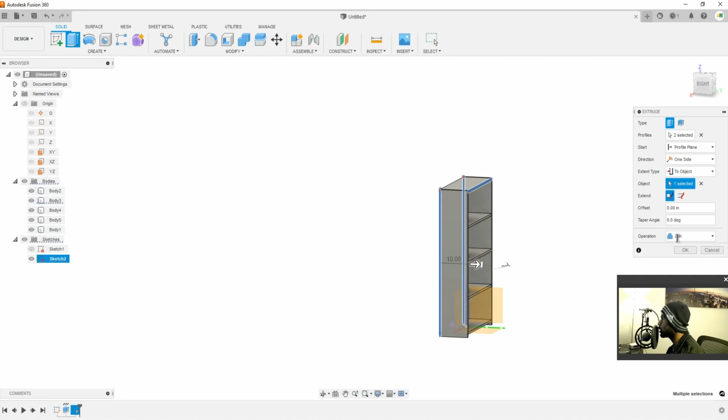In this series we take common woodworking projects and show exactly how they're designed in Fusion 360 from A to Z. Today we're going to be looking at a bookcase that you can pick up at Target, and we're going to reverse engineer it, and then we're going to be making our own modifications so that it can fit our space. So if that's something that you're interested in, let's go ahead and get started.

Alright, so this bookcase that we have today is a 3-shelf bookcase from Room Essentials that you can buy at Target, and it's $25. It's got the dimensions here for 35.98 in height, 24.49 in width, and 9.45 in depth. We're going to be changing that to be 10-inch in depth, 30-inch width, and 48-inch height.

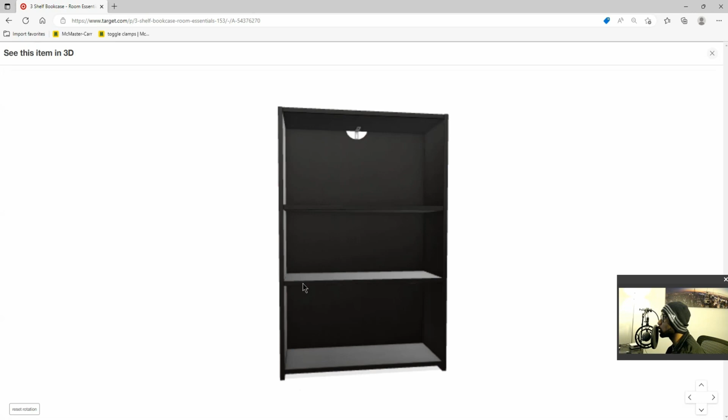It's really cool that here they have the 3D model that you can take a look at. But one of the things I realized is that you can't make a change to it, so you're basically stuck with what they have. So as I mentioned, in today's video we're going to be modeling our own, and slightly change it to the dimensions I just mentioned. So let's go ahead and get started.

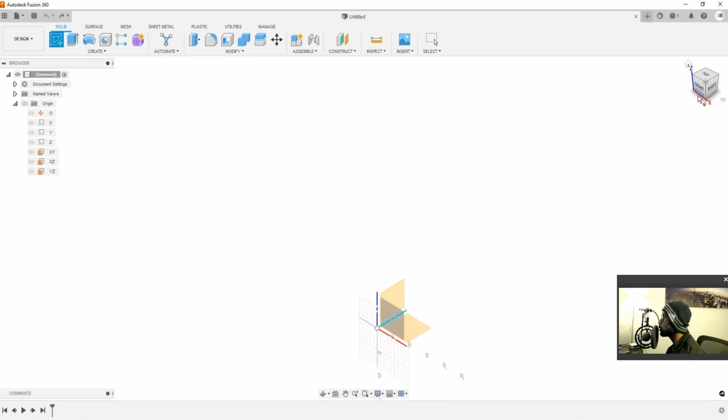All right, now that we have Fusion up, we're going to try to take as little time as possible, but we are going to go through every single click, and at the end we're going to end up with a bookcase. We're going to click create sketch and sketch on the XZ plane. We're going to do the first of our 4 shelves and then our 1 top piece, so a rectangular feature. We're going to do center rectangle, click at the origin, and just sketch and drop.

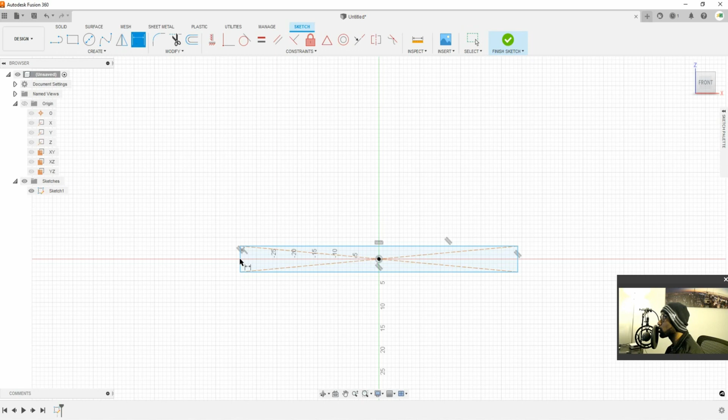You can type in tab and enter the dimensions directly, but I'm old school, so I just click sketch dimension here, and we're going to assume that each panel is 0.75 inches or 3/4 thick. Then we zoom out. We said that we want our width to be 30 inches, but we need to take into account that we're going to have our left panel, which is also 3/4 inch, and on the right side, that right panel, which is also 3/4 inch.

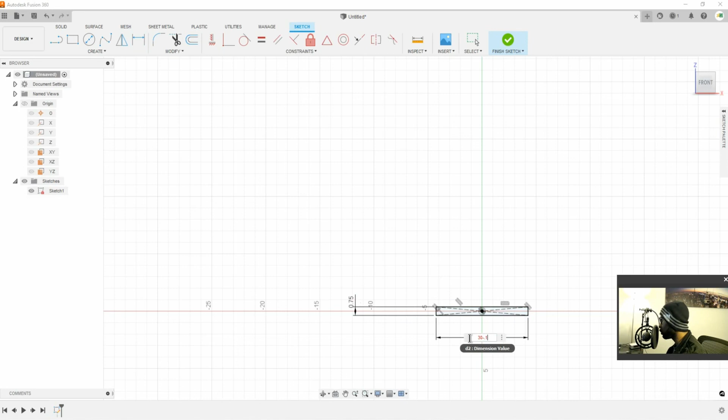So if we want an overall width of 30, then we need to do 30 minus both our panels of 3/4 inch. So it needs to be 30 minus 1.5, and that'll give us 28.5. So once we add on our panels, we'll get that width of 30. Our sketch is fully defined. We've locked it in at the origin, defined the width, and defined the thickness. That's turned all of the lines black, which means it's fully constrained.

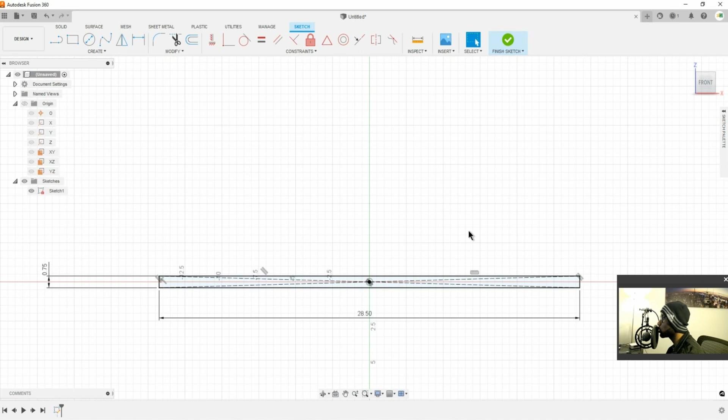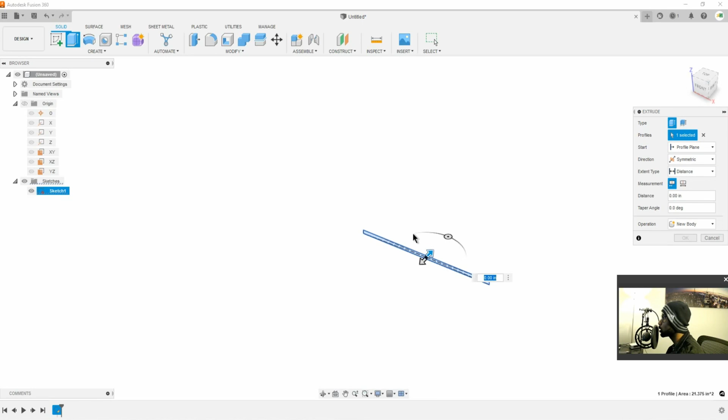We're just going to clean this up. Got to stay clean. Then we finish that sketch, and it's at our XZ plane, which is where we sketched originally. Now it's time to give this some volume, some geometry. We click on extrude, and it's asking which way we want to extrude. We're going to do a symmetry, just in case we want to mirror later on, and the distance on that symmetry is 5.

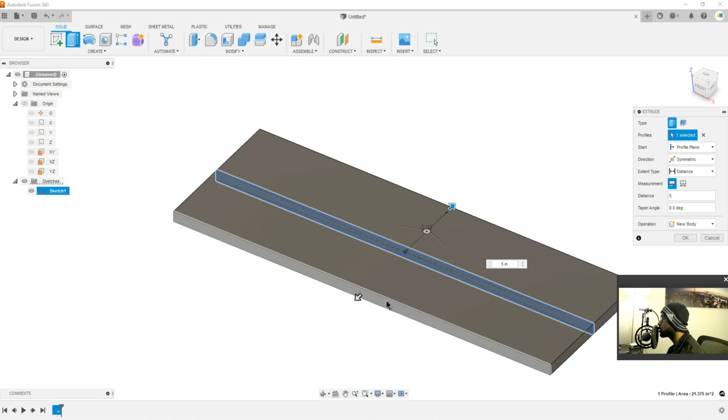So it's going to go 5 from this sketch on our plane to this plane here, and then from this plane to this plane is 5. We said that we want our depth to be 10. So now when we click on this edge, you can see that the length is 10 inches. That's exactly what we wanted.

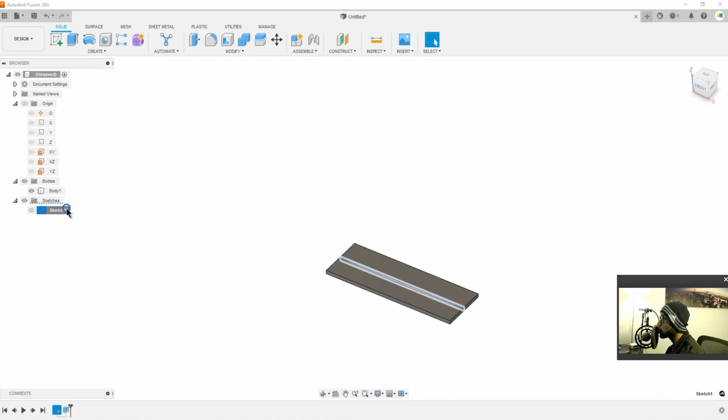Okay, so we can do a rectangular pattern. We could have done that in the sketch; it's up to us. I'm just going to go back into the sketch and do it: right click, and edit sketch. I was going to show you the other way, but this way is just easier. So we click rectangular pattern, and then we select an object.

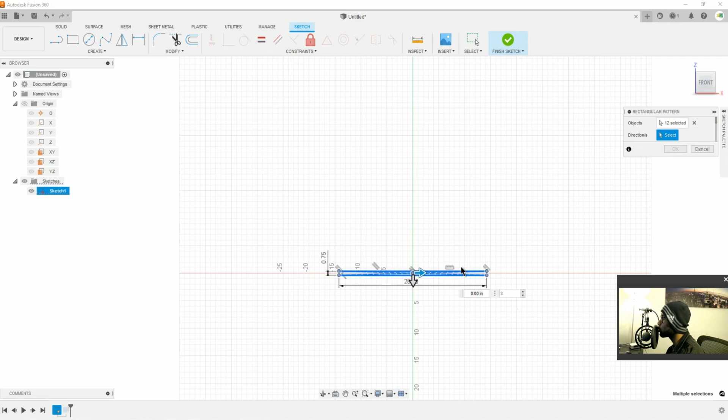We can click on each of these lines individually, or we can hold the left mouse button and drag over, which encloses everything in that window in our profile. So 12 features selected. Now it's asking for a direction. We're going to go up this way and give it a height as well as a quantity. If you remember from the photo, there was a 1-inch difference from the shelf to the ground. If we can go back.

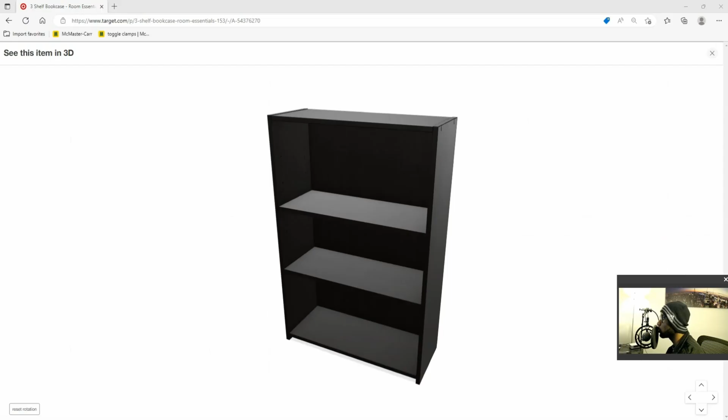So right here, every software is different when it comes to rotating. So here, as you can see, there's a 1-inch height between here and the shelf. So we're going to replicate that. So here, instead of having it be a full 48, we're going to have 47 inches from here up there.

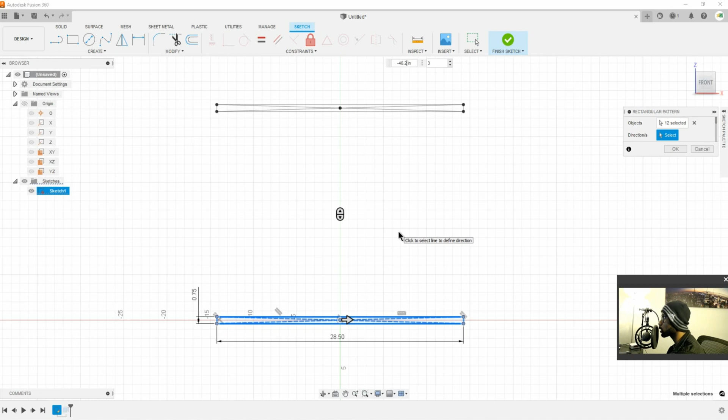But we also need to take into account the fact that we already have the 3/4 of an inch of plywood there. So instead of doing 47, it's actually going to be 47 minus 3/4 of an inch. So the height is going to be 46.25. So now there, from this bottom edge to this top edge is 46.25, and we need 5 quantity instead.

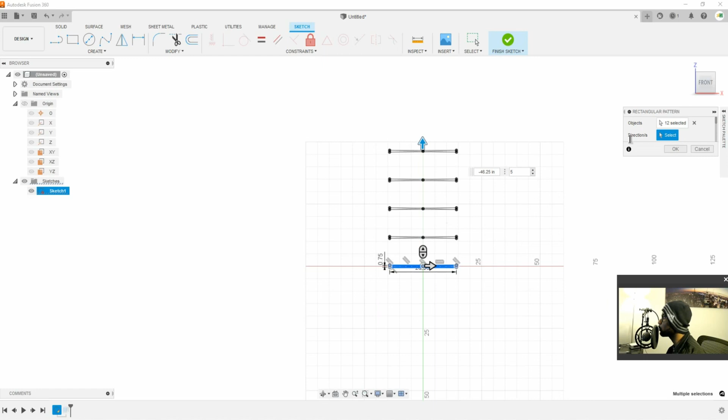So shelf 1, shelf 2, shelf 3, shelf 4, and top piece. We're going to click OK. So 46.25 and then a quantity of 5. Okay, so now we have all of the shelves that we need.

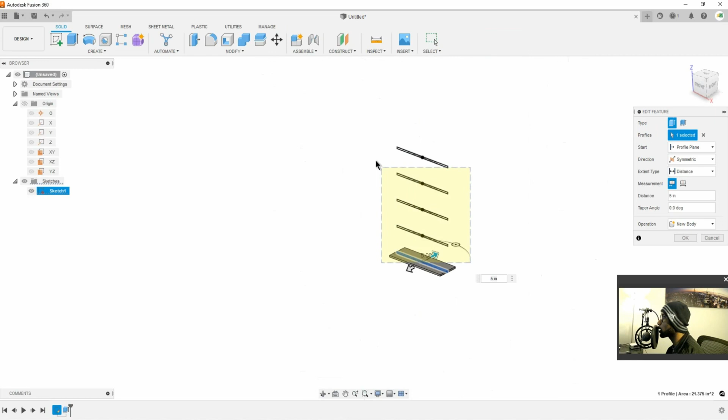And then here under our feature for profiles, we're just going to select all of those. So now we have all 5 profiles selected. We're going to click OK. So 1, 2, 3, 4, 5. I was going to show you the other way where you just create one and then you could do a rectangular pattern for the body, but instead we did a rectangular pattern for the sketch.

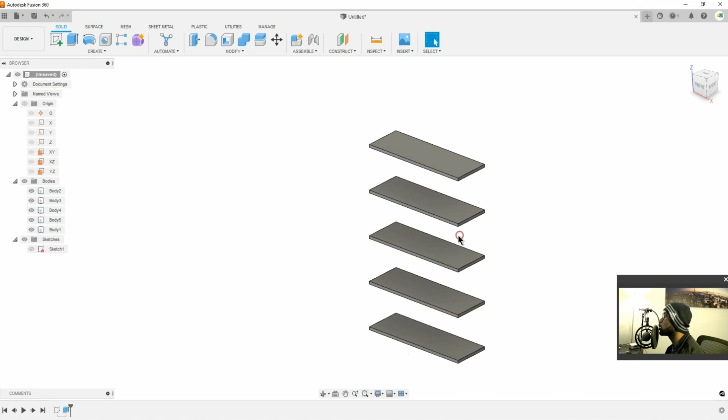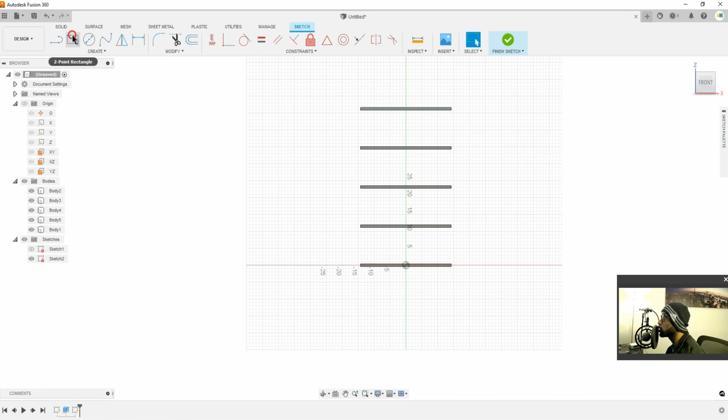So now that that's done, we have everything we need, and we are going to create our left and right panels with that 1 inch off the ground. So we're going to take advantage of existing geometry. We're going to create the sketch on this face. The face is also a plane, so the two work basically the same. So here, instead of a center rectangle, we're going to do a 2-point rectangle, and we're just going to sketch randomly in space, and then we will use our sketch dimension to define it.

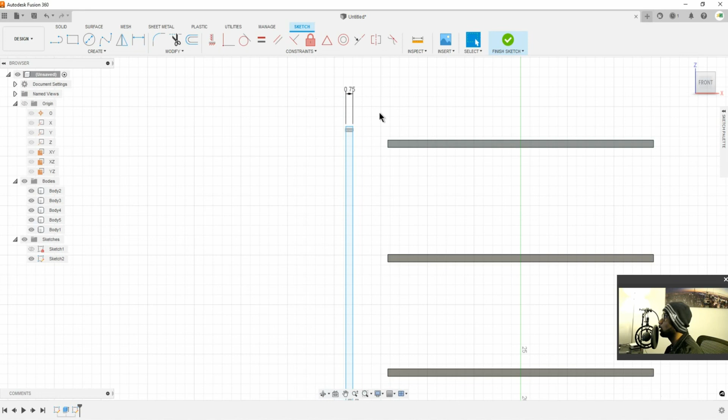Okay, so first thing we're going to do is we're going to make this 3/4 of an inch, so 0.75. Okay, so now that we've done that, we just need to do a coincidence mate for the top. So basically we want to say this point will go to this point. So we're going to do this point and this point. Okay, so now it turned black there, so we know that that part is fully constrained.

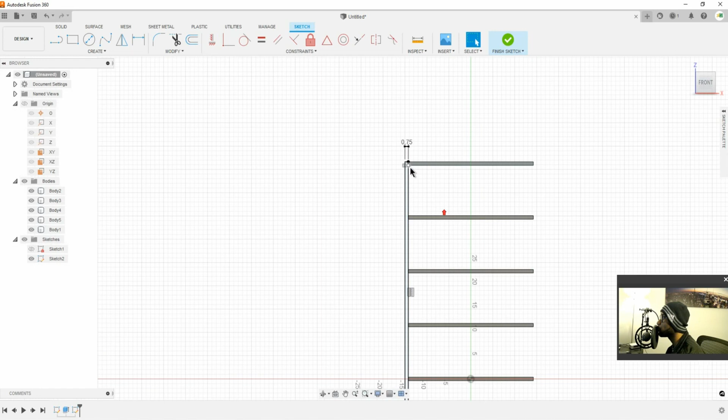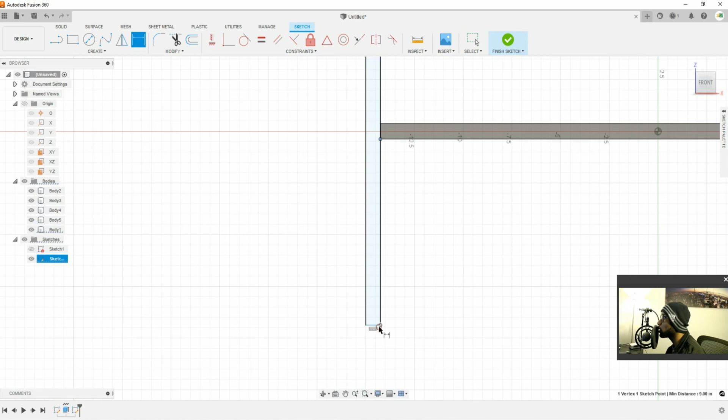So the good thing about doing the coincidence is, again, we don't have to do any dimensions. We just tell it, hey, go from this point to this point, and we want you to be touching and adjacent. Okay, now the bottom. So on the bottom, we're not going to do a coincidence mate with this point to that point, because again, we have that 1 inch off of the ground. So we're going to click that point and this point, and we're going to say we want you to be 1 inch.

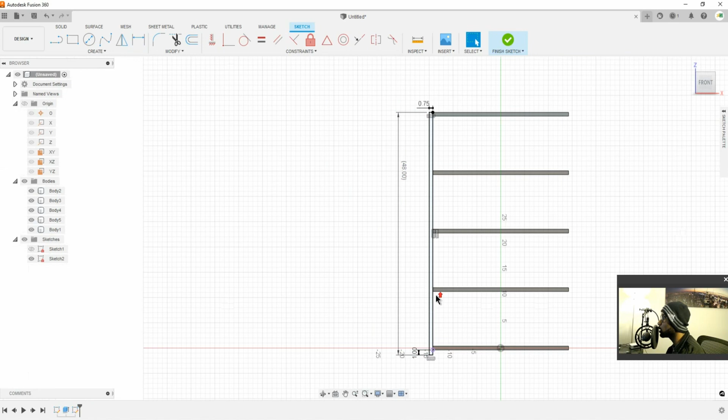All right, perfect. So 1 inch from here to here. And again, we're just using existing geometry. So if we were to try to sketch the left edge, you could see that's 48, which is exactly what we want it to be, the entire height of our bookcase. And so in order to get these other shelves, we just did one rectangle. So in order to get our right panel, what do you think we're going to do? We're going to use the left panel in order to do that.

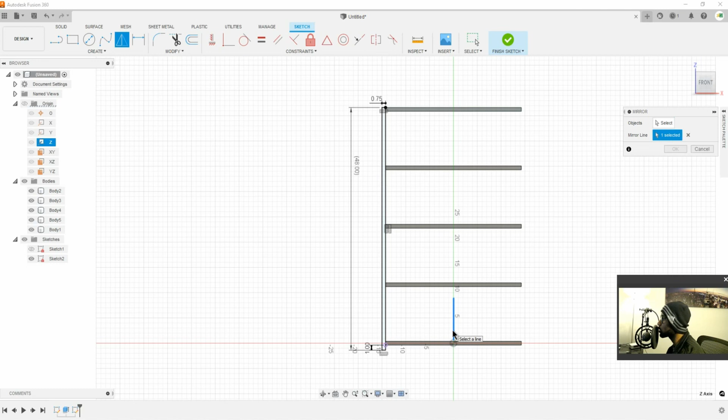So we're going to go to Create, Mirror, and we're going to say we want this profile to be mirrored about the Z axis, which if you click on that as the mirror line, you can click Z, and you could click right here. You could see right here, this is where the Z axis is. So we're going to say, hey, we want this profile to mirror around this Z. Okay, so we're going to grab that. Actually, it did more than we wanted.

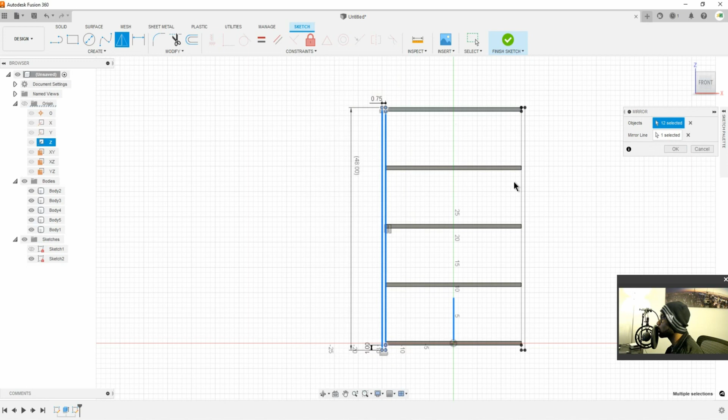So we're just going to say, hey, we want this profile right here minus this. Okay. And then, as you can see right there, it already gets mirrored around. Same thing, we don't really need that. Okay, so we want that to be mirrored. And then now we can click OK. And then if we rotate, you could see it's grabbed both.

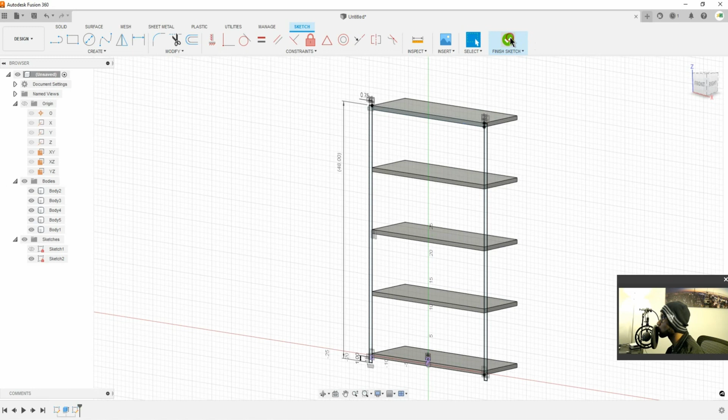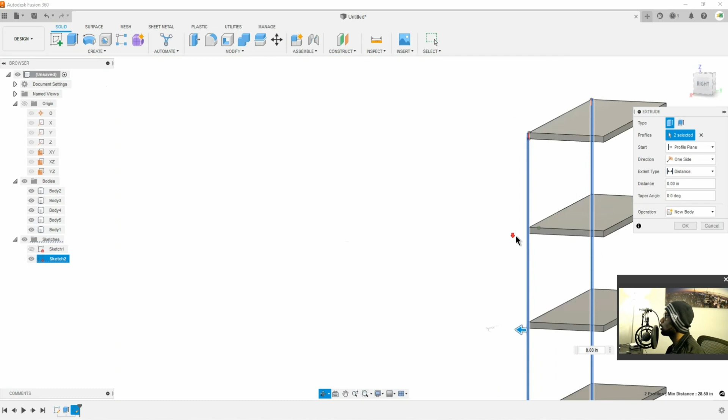And then now we should be able to do an extrude in order to get our side panels. So for profile, we're going to click there and say we want that selected. And then we're going to click there and say we want that selected. Okay, so now that we have those both selected, we need to give it a distance. Now we do two things.

We know that the depth of our bookcase is 10 inches. We can type in 10 for the distance, or we could change the extent type and take advantage of existing geometry. In 3D modeling, you usually want to take advantage of existing geometry when you can because it's easier to make updates in the future.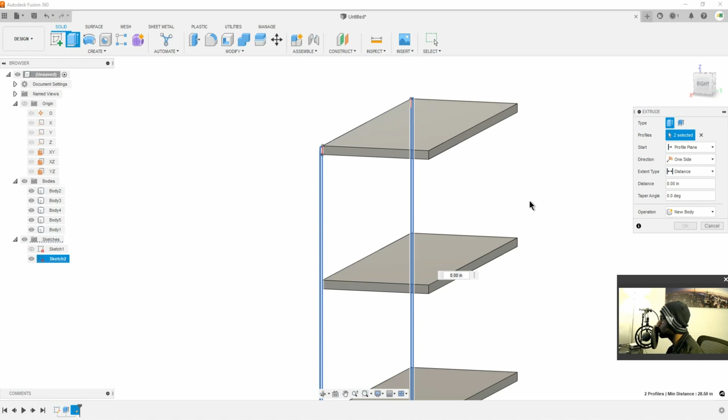If we change the depth of this to 15 instead of 10, then we have to go into our first extrude and change that to 15, and then go into our second extrude and change that to 15. It doesn't seem like a big deal, but when you have 20, 30, 40 extrudes, it can become a big deal. So we're going to change the extent type to object.

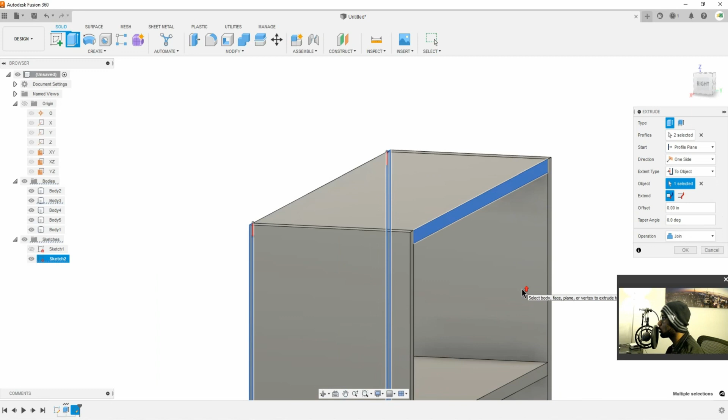And for us, our object is just going to be the other side. So here's our sketch, and we want it to extrude to this distance. Okay, so now we're taking advantage of this face for existing geometry, and everything should line up. We're going to say the operation is join, and then we went from having 5 or 6 different bodies just to having one. And now when we rotate, you could see we have our bookcase.

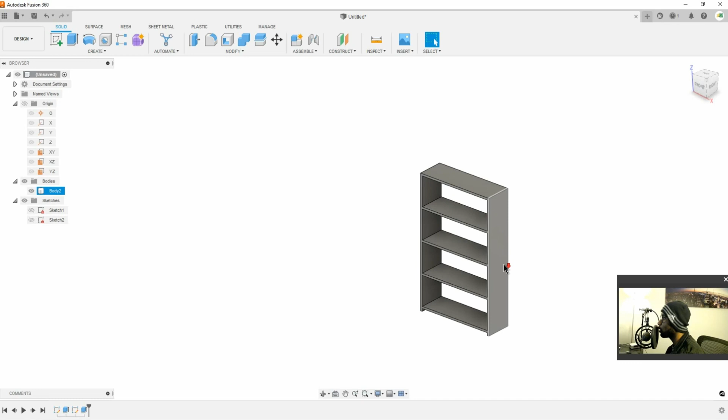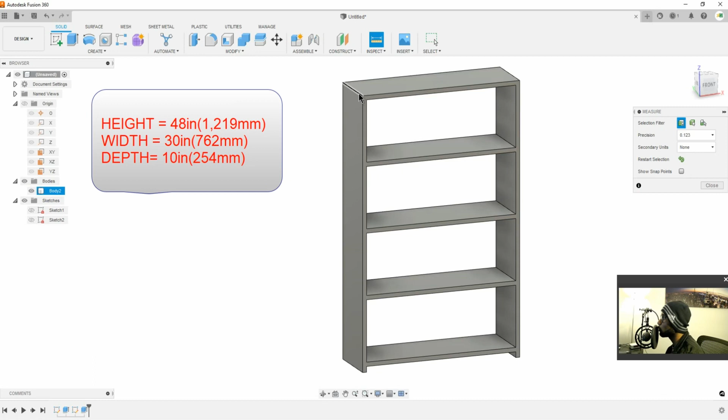And let's just verify that we have the dimensions we want. So if we click here, we wanted 30 inches in width. We wanted 48 inches in height. So if we click here, yep, it's 48 inches in height. And we wanted 10 inches for the depth. And here we have 10 inches for the depth. So I would say that we're pretty lucky and we got everything right on the first go.

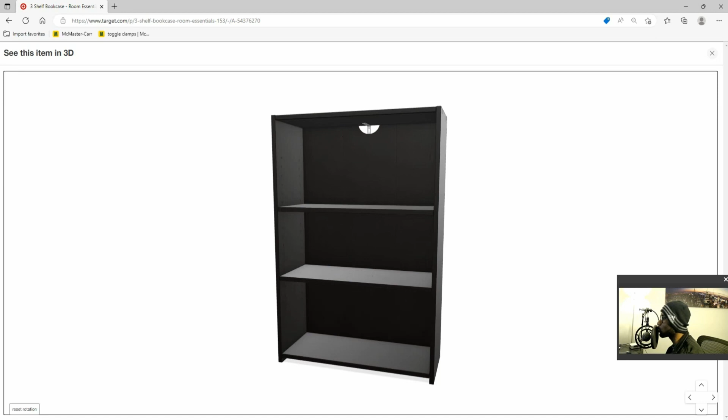And now, unlike what we had here, we have a custom bookcase, and we can do the back panel if we want. That's just another feature. Basically, it's just another rectangle that you would put in, and we can leave it like this. I prefer not to have a back for some bookcases that I've made because it's just easier, where you don't have to worry about routing an edge. It's just a little bit cleaner profile.

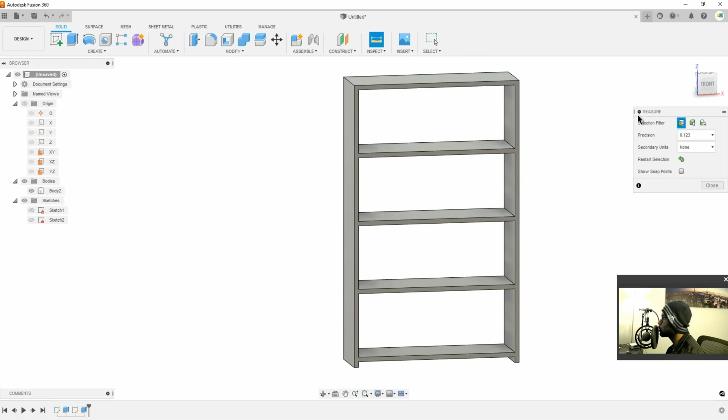Okay, so one more thing we want to do is we want to give this an appearance. So we want to give it the appearance of cherry. So we've already verified that our bookcase is done, and we just need to give it a new appearance. So we're going to press A, and then here we're going to type in wood, or you can type in cherry.

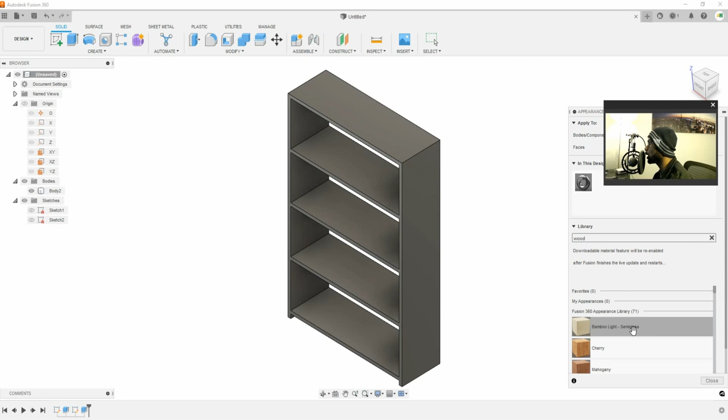Let me move this box. Okay, so here you can see we have cherry, we have mahogany, we have bamboo light. So we can do different options. So we can drag bamboo over there, and we can see that. I like that. We can grab cherry, we can drag it there. I don't know, I'm feeling the bamboo light. So that is how you 3D model and change the appearance for a bookcase.

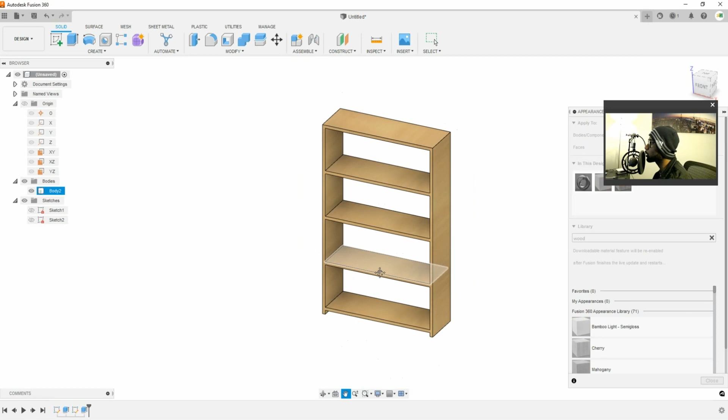So basically, you could see all a bookcase is rectangles in this instance. And really, we only took the time to draw 2, and we just took advantage of our 2 rectangles that we drew and sketched in order to make the entire bookcase. And like I said, the reason why we did it that way is because if we ever want to change something, it should update automatically.

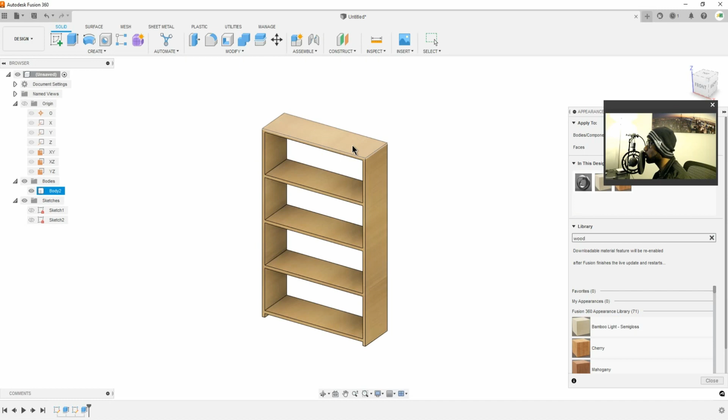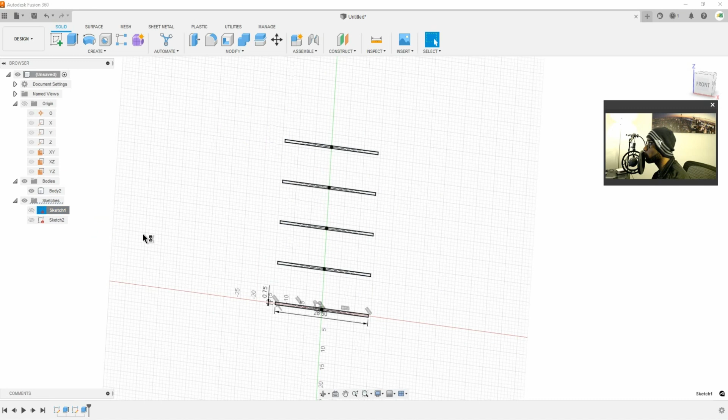So I'm going to go out on a whim really quickly here, and I'm going to change sketch 1. We're going to move it over ever so slightly and see if that makes a difference. Let me zero out of that. Okay, so for sketch 1, instead of doing 28.5, let's change the whole thing and make it 50 inches in width and see if that updates our entire model. And it does. Again, that's the benefit of 3D modeling. That's the benefit of parametric modeling, is one change can control your entire model.

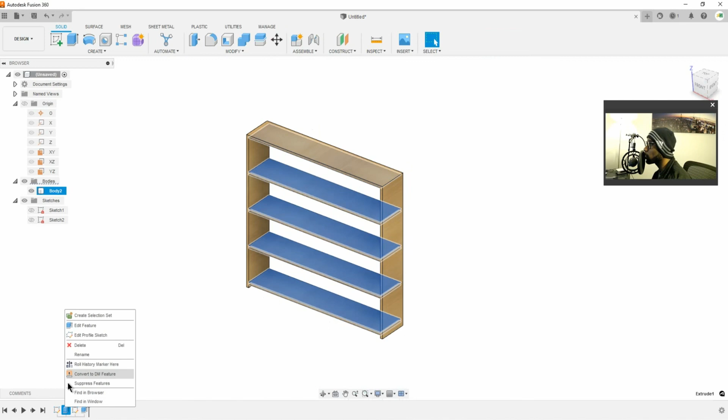And same thing, if we wanted to change our depth of the bookcase, instead of doing 5 and doing 10, which would make it 20, you can see right there, in a matter of a couple clicks, because of the way the model was set up and having the forethought of thinking about the changes you want to make ahead of time, you can easily make those changes on the fly. And there's an infinite amount of possibilities and changes that we can make.

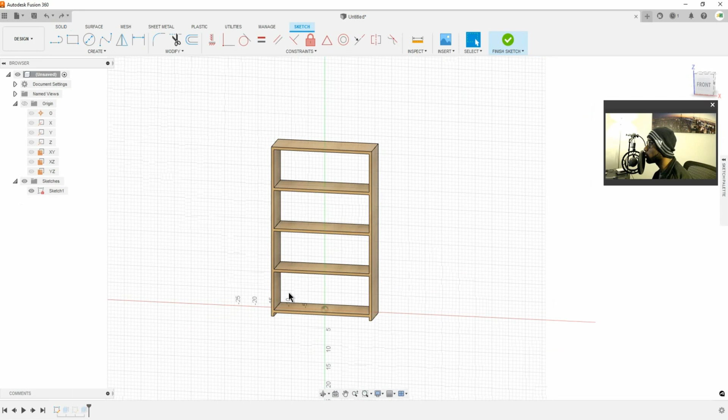Or if we want to walk it back, I can just Control Z and get rid of all of the changes that we made. And now we're back to our original. So this is probably the biggest benefit of 3D modeling, is being able to make all these changes on the fly.